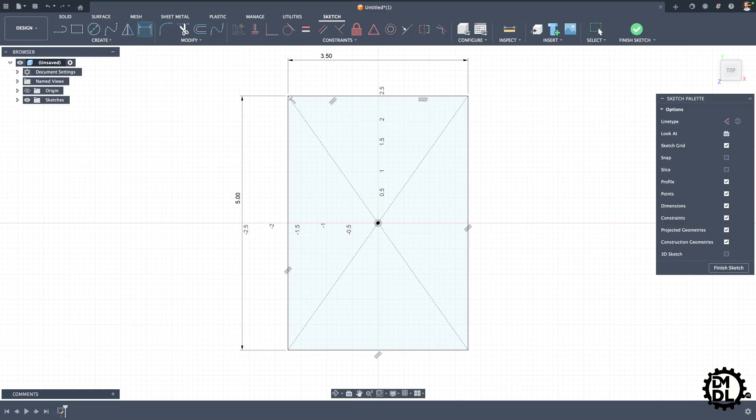To start off, we need a body. So let's create a sketch. Let's make it quite simple. We'll do a center rectangle. We'll throw some dimensions on there just to make sure everything is constrained. Let's do 3.5 by 5. Okay, extrude. Let's make this 3 inches tall.

That looks great. Okay, so the first step is going to be how to split a body. We're going to want to use this split body tool here. If you click on it, there's the body to split, which is our body right here. Then also a splitting tool, and this is what it uses to actually split the body. It essentially determines the plane that we will use to cut this into 2 pieces, which I can show you right now.

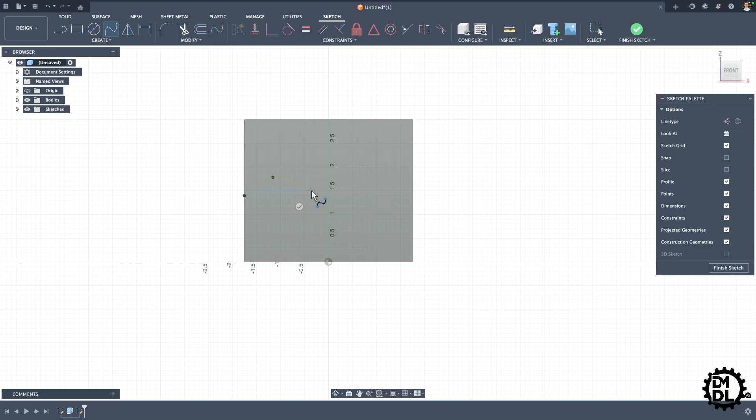Let's click this front face here. We'll create a sketch on it. And let's go with a more creative split. We'll use the spline tool and just kind of place some points here. Have a little bit of fun with it. Okay, that looks good. Nice little wave.

And let's just say that that is our sketch. That's how we want to split this. So essentially, we want to cut this into 2 bodies with a plane that goes through this line and cuts all the way through the body.

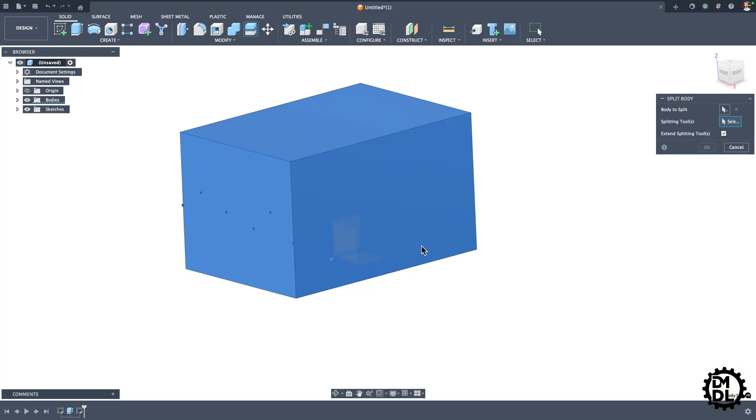So let's go back up to split body and the body to split. It's this one. There's only one body to choose, so that's pretty easy. The splitting tool, we will select the line that we just drew, and then it will show you a preview of what this is going to look like. So it just creates a plane through the line that we created on that face. That looks interesting, a nice wave going through this body.

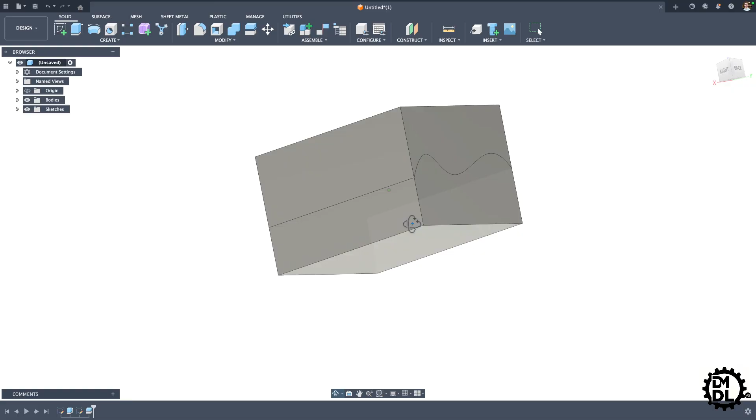Let's hit OK, and there it is. So you can see that this body is split all the way through. You can confirm that by going up to bodies. Let's hide one of those. And look at that. We have a really nice curved top to this body that we had previously created. And if you only want the top of this, you can also hide the bottom, and there we go. This body has been split.

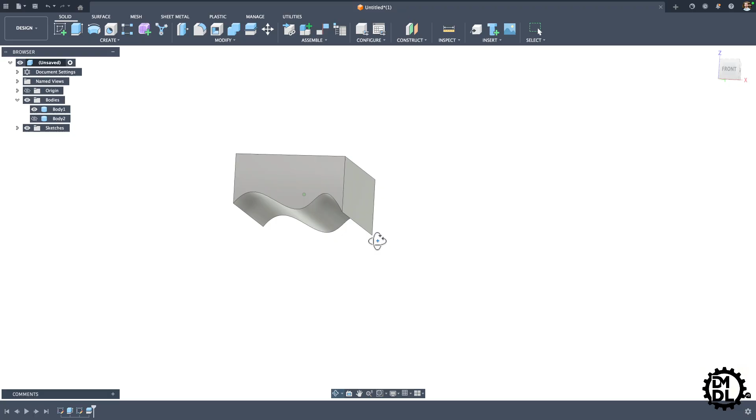This is a really useful tool and that can apply in a lot of different situations, maybe where you want to start with some simple geometry and then split it into multiple parts. However, you can also just split a face, and this also gives you a bit more flexibility with applying things like appearances. So let's go through that real quick.

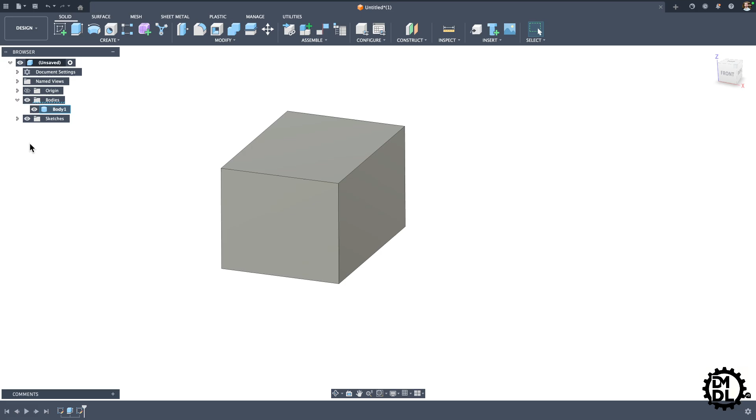Let's delete this split body. We still have the original sketch that we created. That's right there. And let's say we want to split this front face into this top face here and this bottom face. And I guess first, why would you maybe want to do that?

Well, if you are trying to apply an appearance, let's apply some brass with a knurled look. And of course, that applied it to the whole body because I have body selected. So let's undo that appearance.

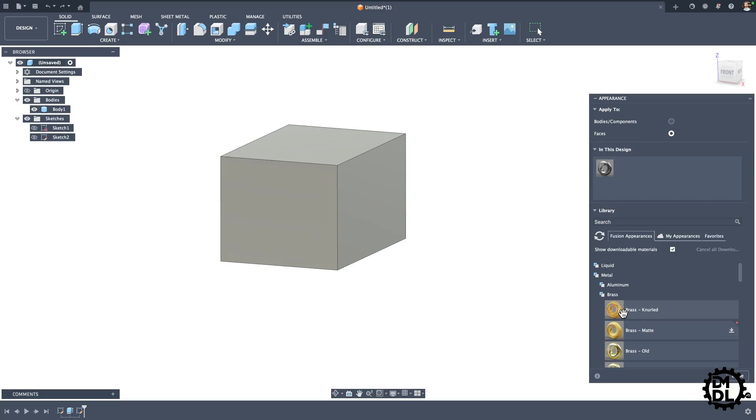Okay, go back up to modify appearance. And first, let's click faces. We'll drag this over. And now that face is knurled brass. But what if we wanted that face to be multiple appearances? We wanted it to have multiple appearances. Well, let's close that. We will undo the knurled brass and again show this sketch.

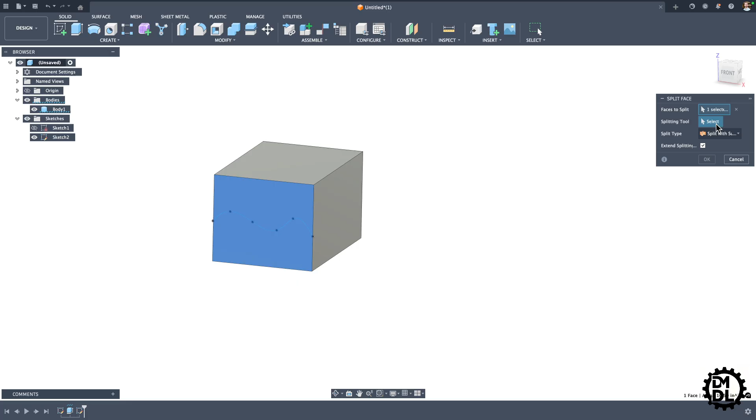And instead of going to split body, we'll go to the drop down and you will find split face. And it's very, very similar. So it asks you for the faces you want to split. Click that face, the splitting tool. Make sure you hit select and we will select this line. Again, it shows you this plane that it will use. However, when you hit OK, instead of splitting the entire body, as you can see, there's no line through the side. It only splits this face.

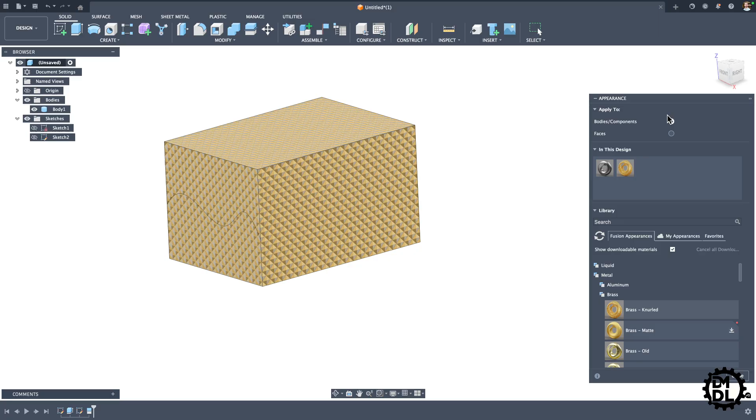So if we go back to apply these appearances, we can drag our brass over. Oh, again, I applied it to the whole body. So we don't want to do that. Make sure that you are applying it to the faces. There we go, click and drag. And there it only applies partially to the face and follows this line that we drew earlier.

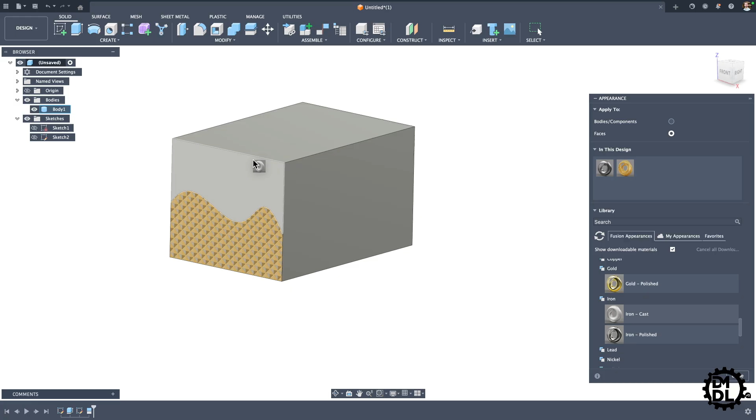And let's say we want to apply a cast iron look above it. So now we are able to apply two very different appearances on the same face of this body.

So that's a quick tutorial on how to split both a body and a face. That's it for this one.